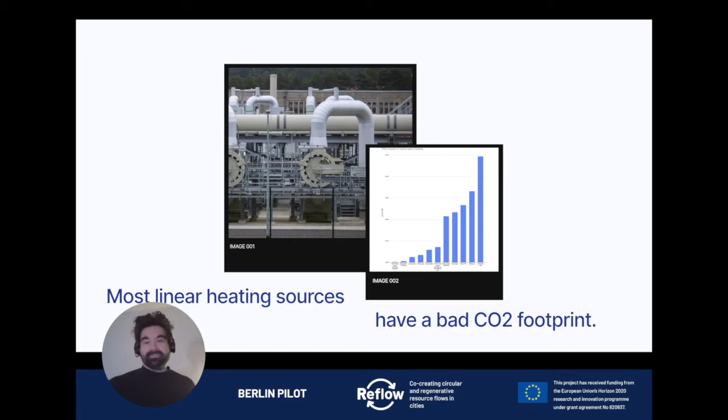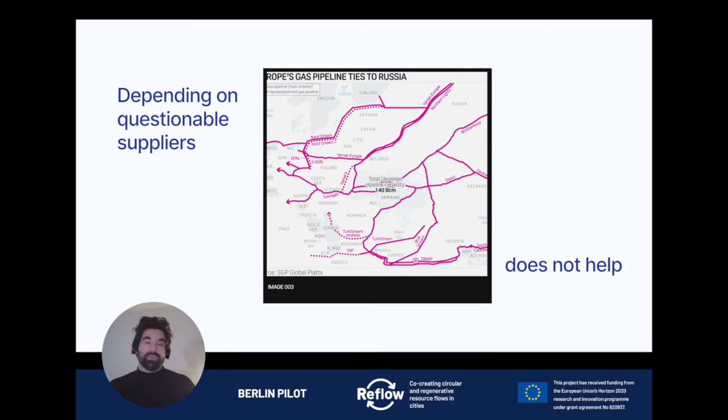It also doesn't help to depend on questionable suppliers. Right now, due to tragic political circumstances, we are seeing that the dependency to questionable suppliers of linear heating sources is a huge problem that we want to get rid of as European societies. That's why we were looking into different heating sources and into the most circular one, as we say.

And we understand the waste heat as a circular heating source because it means reusing heat which has been produced before. For instance, picture a big building with many flats, people taking showers. The warm water will go to the sewer system that is below the streets. And if you have the proper hardware in place, you can reuse that warm water and channel it into other buildings, redirect it, reuse it.

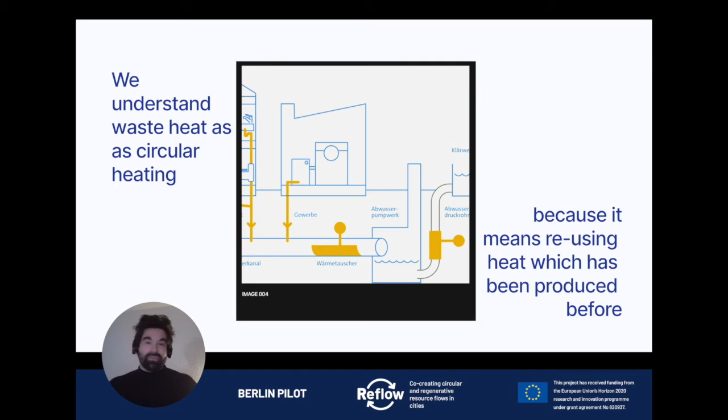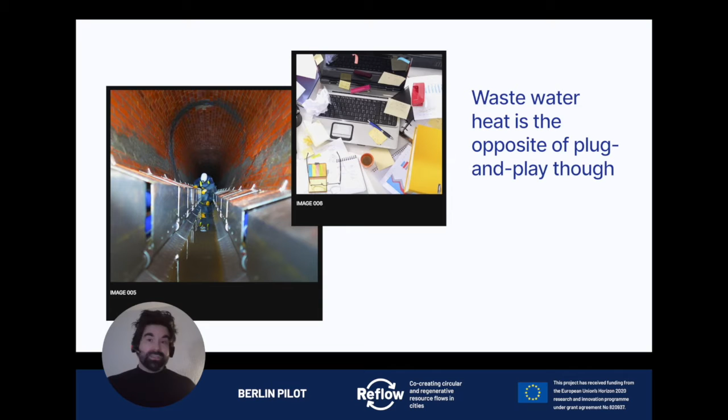Of course, that's actually quite a big effort to make it work. It's the opposite of a plug and play system. You need to install costly hardware, it will take time, and most importantly, you need to consider various types of information, starting with the energy demand of the buildings nearby and the energy supply or the heat supply of other buildings. And this is exactly where we wanted to start.

We wanted to build a solution which allows you to combine all relevant data about the urban infrastructure for making decisions about where to implement wastewater heating systems. So you actually need to consider quite a few information to make sure that it's economically and ecologically viable. And that's what we wanted to support with a web application because we realized wastewater heating is not being implemented often enough, primarily because the information about all the relevant stakeholders and their interests are not synchronized.

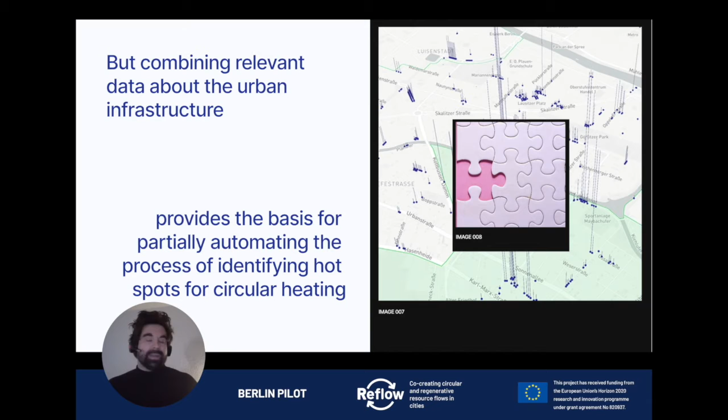So that's why our solution is a pretty data-driven solution. It's a very digital solution if you compare it to other reflow projects. However, it turned out to be just the right approach to solve the problem that often property owners, property developers don't know where wastewater heating is possible if their property allows for it, and also make it easier for the city of Berlin to suggest this circular source of heating for new projects.

So we started with simulating all kinds of data about the pressure pipe network, the sewer system. These are simulation data our local partner, the city of Berlin, in form of the Berlin Water Management Agency, developed. They actually have a vast amount of knowledge about it in the meantime.

We also took into account operational data: which are critical areas? Where is construction work planned? Which are water protection areas? What is the frequency of the sewer cleaning? All these operational factors need to be considered if you want to come up with a suggestion where wastewater heating makes sense in the city of Berlin.

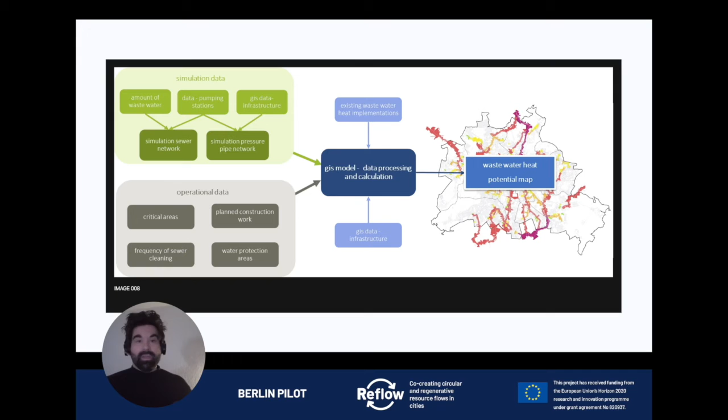We combined that with data about the urban infrastructure, like parameters of houses, which are the biggest properties that demand a lot of heat, which are existing wastewater heat implementations that we could connect with. And all these data would be pooled in one application, basically, and we would get a wastewater heat potential map. It shows where it would make particular sense to implement wastewater heating as the circular source of heating that we think is to be preferred over linear sources of heating.

Our prototype shows where wastewater heat potentials and demands could be met within the city very specifically. So you can enter an address and you'll get information about where it makes sense to use it and how much of the energy demand can be covered.

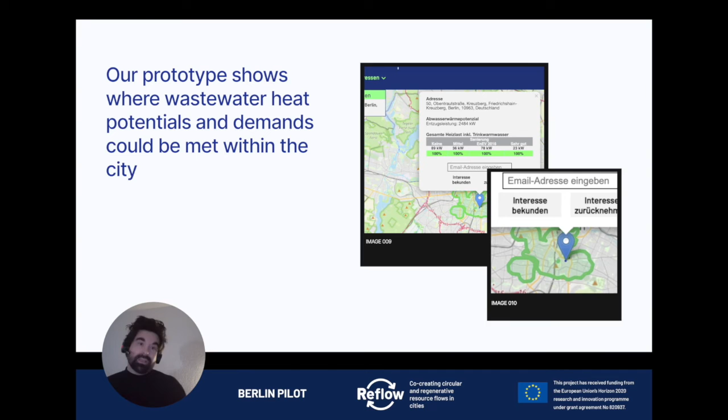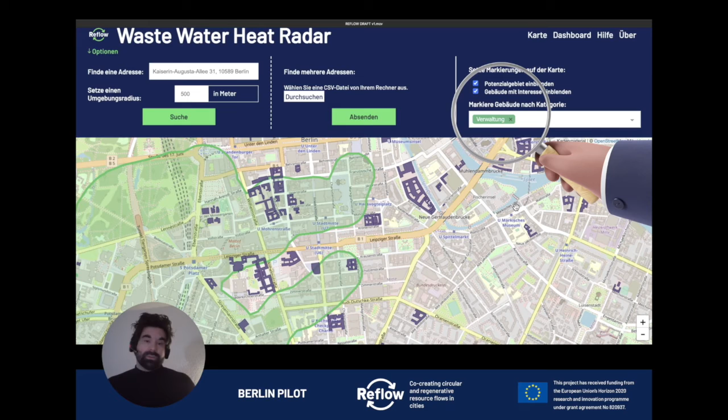You can search for different types of properties, such as administrative buildings, here marked in lilac. And this is particularly interesting, for instance, for an urban planner who works for the city of Berlin or any other European city, of course, and wants to modernize administrative buildings in terms of heating.

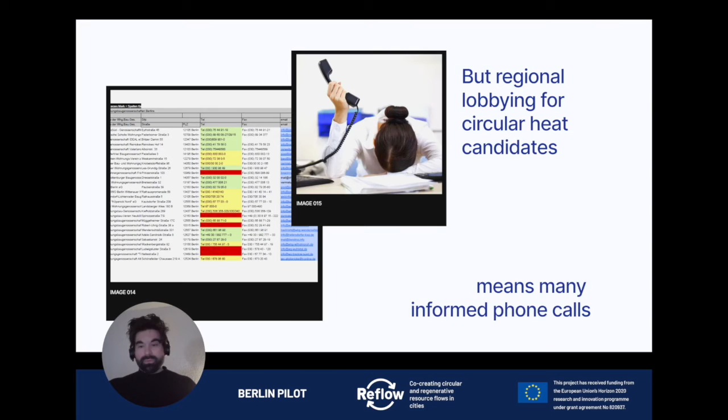Finally, I'd like to invite you to work with us to develop the platform further. So with you, our platform could be extended to other sources of waste heat. We are talking about wastewater heat, but what about server buildings, server hubs that also emit a lot of warm air as waste heat? That can be moved from one property to the other using other technologies such as mobile energy storage. You could also team up with us to add functionalities. Think of sector coupling, so combining wastewater heating with other energy sources. This is where it actually becomes very complex, and we would love to look into this potential with you using the open source software that we have developed.

So please feel invited if you are representing a smaller city, a public stakeholder or a private stakeholder or a nonprofit to team up with us and use what we have to make it a holistic energy planning cockpit for public users. I think this could be an amazing

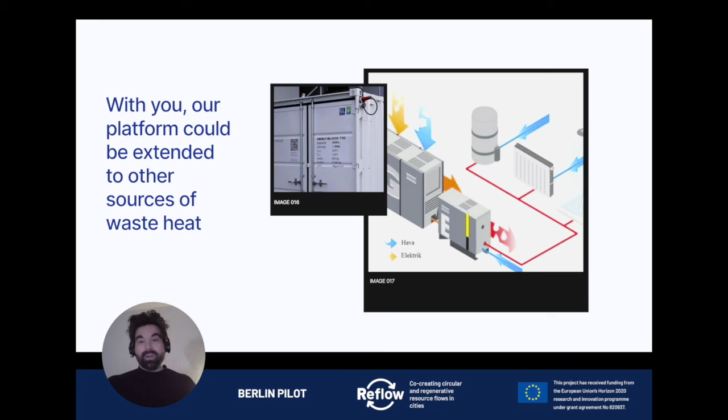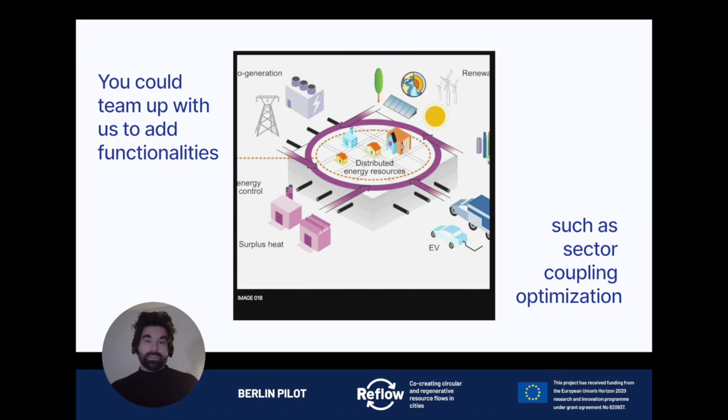Also, you could team up with us to add functionalities, such as sector coupling optimization. It basically means to figure out the optimum using different sources of energy, both circular as well as linear, as long as we still depend on them. But definitely it is something a lot of smaller cities would benefit from, like a holistic planning cockpit for the use of primarily circular heating sources. So if you're interested in teaming up with us, please reach out to us, and we are looking forward to connecting with you.